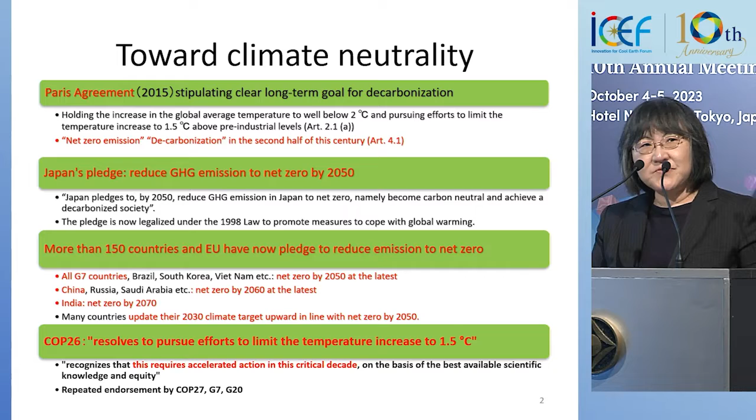Also, in COP26 held in the UK, the climate negotiation meeting, more than 190 countries agreed to pursue their effort to achieve the 1.5 degree goal. This was already confirmed by the G7 heads of states and also G20 heads of states.

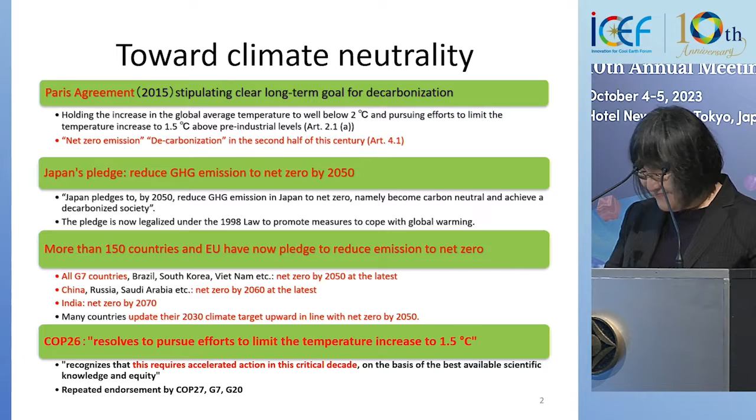The background of such an ambitious target is the feeling of climate threat. As you know, even this year we have had a very severe heat wave, which caused forest fires and also flooding. And climate science shows us that this will become more severe.

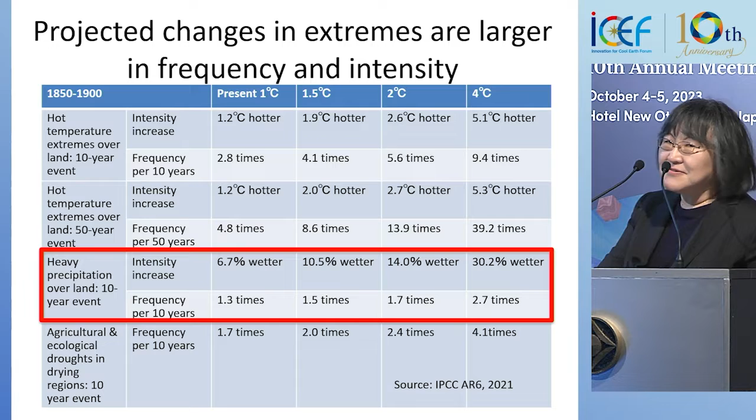Yes, climate science projects that such climate change will become more frequent and more intensified. So the most recent science shown by the IPCC sixth assessment report tells us we have to really reduce our emissions at such a scale and with a very speedy pace.

For instance, by 2030, compared to the current emission level, globally we need a 43% emission reduction to achieve the 1.5 degree goal with more than 50% probability. And looking at the CO2 basis, by 2050 we have to reach almost carbon neutrality.

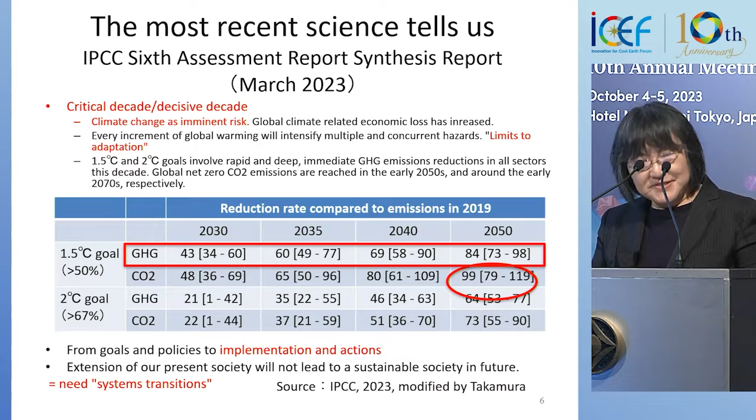So this clearly needs a system transition. Especially here, the topic focuses on next generation PV, and looking at what kind of speed of energy transition, especially in the power sector, is needed.

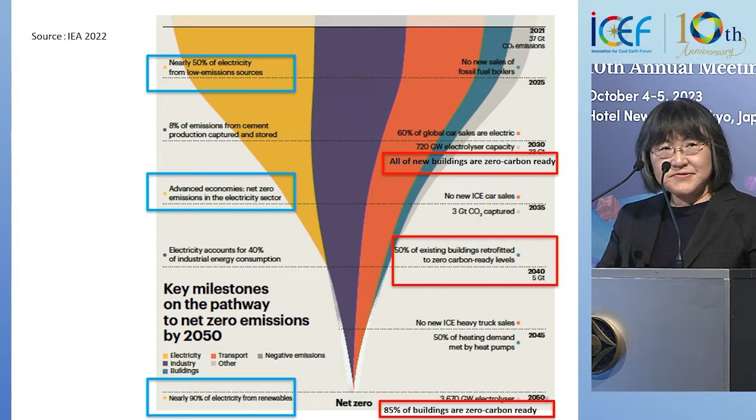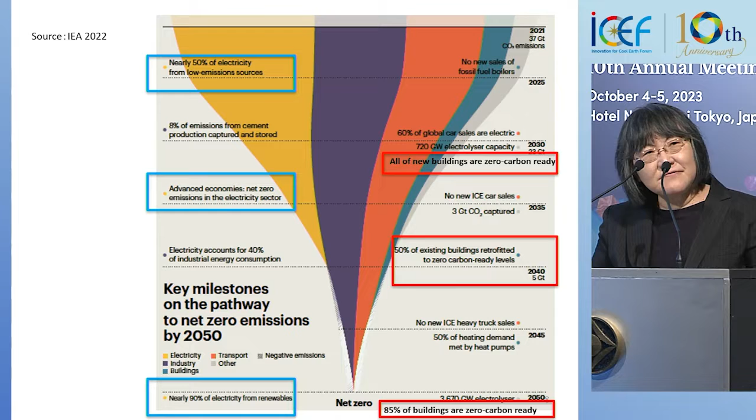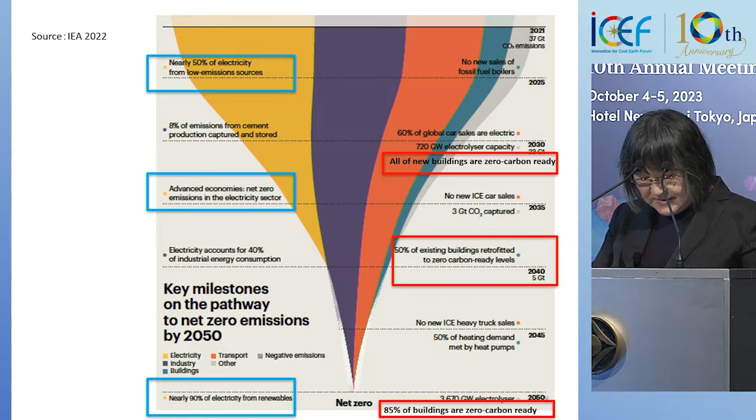This comes from the International Energy Agency NZE scenario, not the most recent one, but published in 2022. By 2025, globally nearly half of electricity comes from low carbon sources. By 2035, developed countries' power sector should be largely or completely decarbonized, shown in blue. By 2050, nearly 90% of power comes from renewable sources.

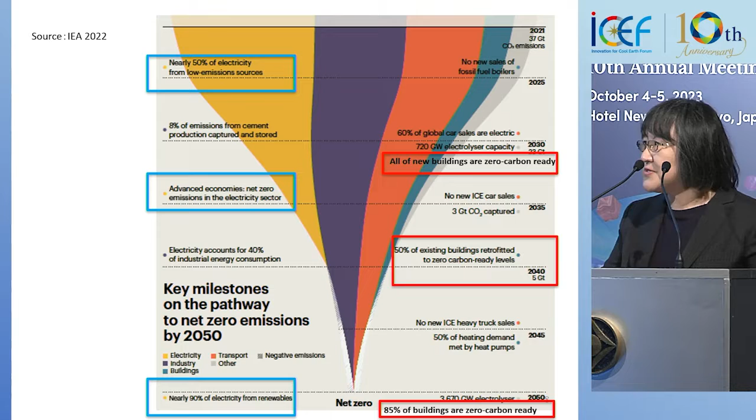So the good news, as Mr. Ando from METI already mentioned, is that we now have cost-effective mitigation options. Among them, solar and wind have the most potential as mitigation options.

And currently, under the expansion of new power generation, new renewable capacity is expanding, and investment is expanding as well.

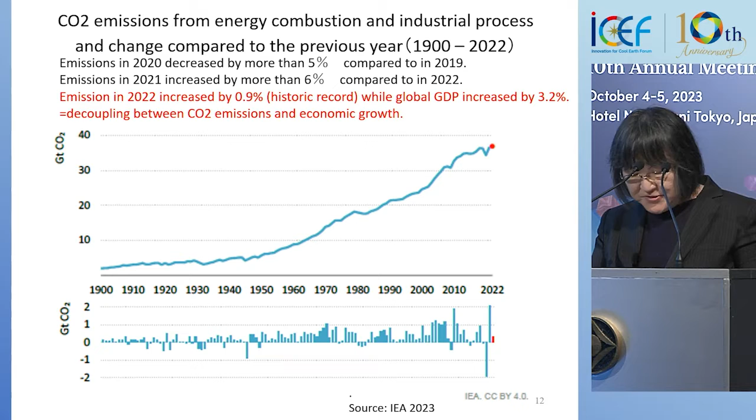Unfortunately, we have not yet reached a plateau of global emissions, but still, in terms of 2022, solar and wind expansion actually offset almost the increase in emissions from the power sector. So that is, I think, a really promising situation toward the decarbonization of the power sector.

But still, in order to achieve net zero by 2050, the most recent IEA report on the net zero scenario says we need to triple renewable capacity by 2030, and beyond that, further still.

So solar especially has a very critical role to achieve such an ambitious target in terms of renewable capacity and power generation from renewable sources.

So I understand that perovskite solar cells have made quite good progress, especially in terms of efficiency, and also the possibility of much broader application, for instance in urban areas, where large-scale deployment of conventional cells could be difficult. Cities account for more than 60% or 70% of global emissions from city activities. So perovskite and next generation PV cells have a critical role to achieve a decarbonized society by 2050.

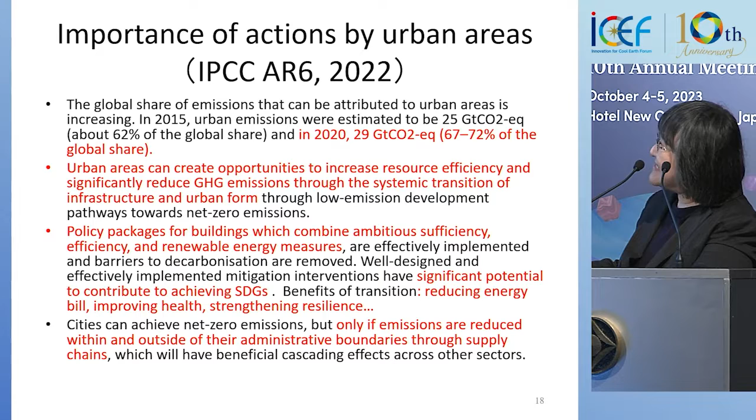Last but not least, I wish to finish my speech with the expectations and challenges of new generation PV. As I said, a greater role is expected in emerging new energy systems toward decarbonization. To make this scenario a reality, we need technological innovation, of course, but also institutional innovation, supported by policy and measures.

So here I just cite the need to create fast and early demand for new technologies such as next generation PV and also create a market. And of course, for new technology we need some institutional arrangement, especially standards, quality control, and the regulatory framework.

Infrastructure is also necessary. So in the end, I think to make this expansion of renewables and decarbonization happen, we definitely need collaboration across a variety of technology areas and disciplines, including the chemistry and chemical industry, the energy sector industry, and architecture and construction companies. I think this panel's following speeches will cover this kind of collaboration.

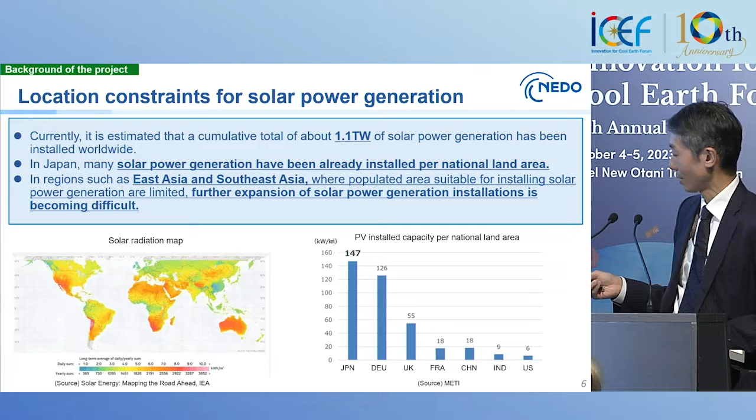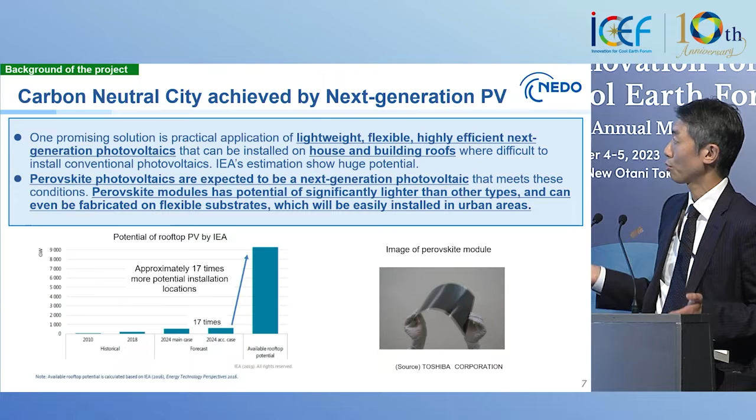So one of the solutions is this kind of lightweight, flexible, high efficiency next generation photovoltaics. The left slide from IEA shows the rooftop and building sector has a huge amount of potential installation of photovoltaics. Perovskite is expected to be one of the key solutions because it is significantly lighter than conventional photovoltaics, and it can be easily installed in urban areas.

In this Green Innovation Fund project, we developed R&D focused on the perovskite project. We conduct R&D focused on high efficiency, large size module, durability, and reliability. We aim for social implementation of perovskite photovoltaics by 2030.

So we have 3 stages. One is laboratory R&D, second is upscale, and third, demonstration project. Now we conduct theme 1 and 2.

One is basic technology, mainly conducted by AIST. Second is the application project, conducted by 5 companies: Sekisui Chemical, Kaneka Corporation, Toshiba, EneCoat Technologies, a spin-out venture by Kyoto University, and Aisin Corporation. The 5 companies in the project each work on a different type of perovskite photovoltaic module. NEDO supports this project.

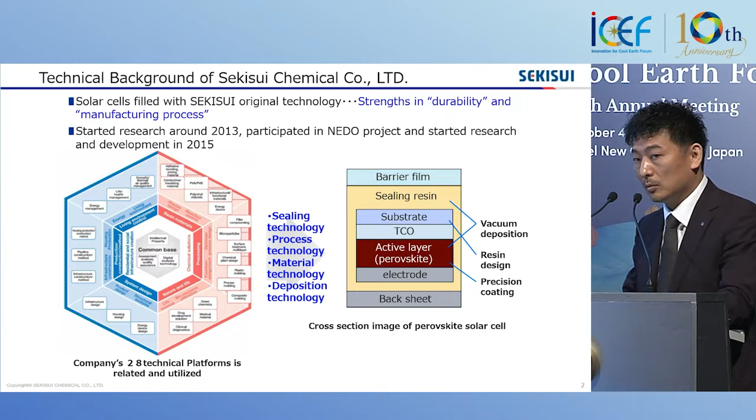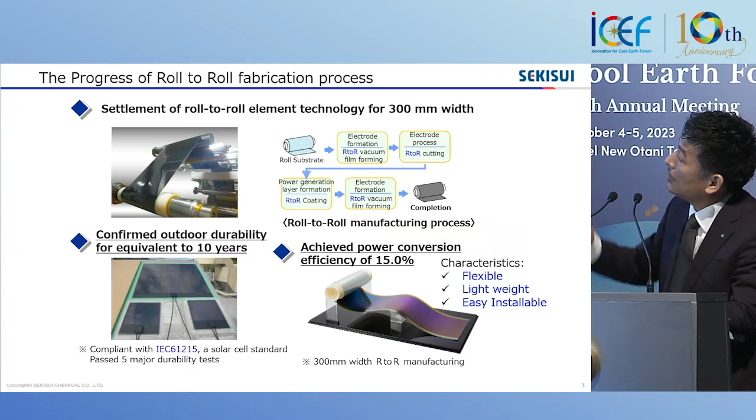In our systems, we are concentrated on the roll-to-roll system for fabrication of perovskite devices. Now we are concentrated on settling the 300 millimeter width. As you can see on the upper left-hand side, this is our roll-to-roll process, and the black part is the perovskite material. The roll-to-roll process is very standard in our Sekisui Chemical company because we handle film a lot.

We have transported this technology to application of device fabrication for perovskite coating. Now we can make, shown downside and left-hand side, devices of 30 square centimeters and 1 square meter devices, compliant with IEC 61215, which is a solar cell standard test 5 major durability testing decided by the rule. Finally, we have achieved a power conversion efficiency of 15% in our roll-to-roll based perovskite devices.

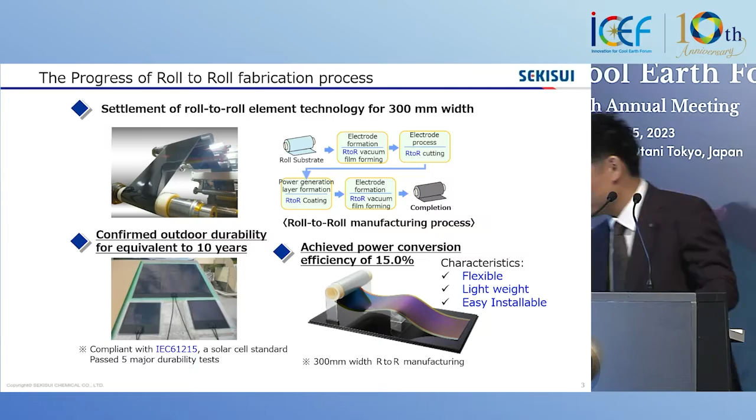So now we have film devices. The characteristics are flexible, lightweight, and easier to install. This is an example of our devices. It's very light and very bendable, flexible, and we can make this kind of device with a very easy fabrication process and low cost.

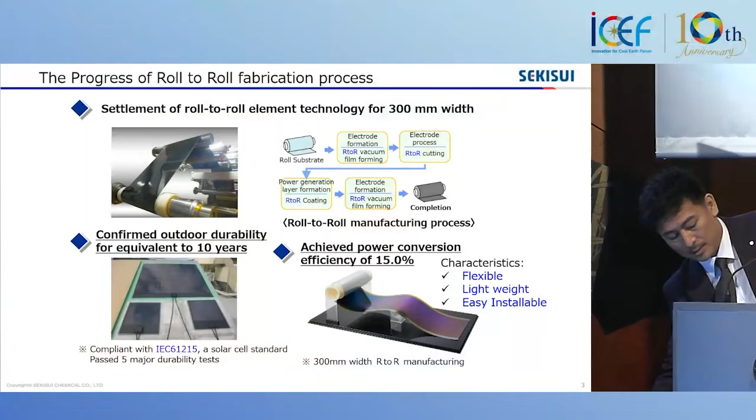Now maybe people are thinking about the very good technology of silicon based photovoltaic systems already. But actually silicon is very great, the solar cell is really nice and efficient. Silicon solar cells already show about 20% efficiency and more than 20 years of durability testing, really stable. Now for our perovskite solar cell at Sekisui Chemical, the current efficiency of the 30 square centimeter device is a power conversion of 15%, and the durability is just 10 years.

So this is not enough for the market. We are thinking about developing 20% power conversion efficiency in the future, as soon as possible, with more than 20 years of durability together with high efficiency. Now we can make 1 meter by 2 square meter modules by roll-to-roll process. It's possible, and it's a very light process.

This contributes to domestic industry, since silicon source is dependent on overseas supply. In Japan it's not easy to get good silicon source, so we need to import from overseas. But compared to this situation for silicon solar cells, for perovskite solar cells, stable supply of materials in Japan is fixed. Perovskite key materials are iodine and lead (Pb). Actually 30% of iodine production in the world is from Japan, fortunately, and this gives a cheap and stable supply of lead, very easy to get. We are also making an effort to develop a lead-free system as well.

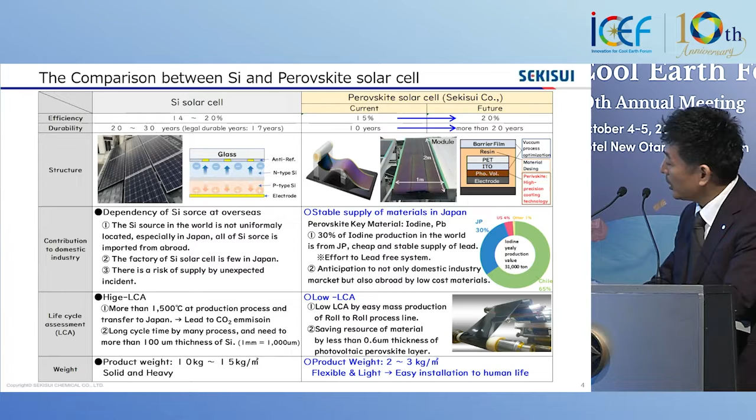Our target for the power generation cost, this is also a target of NEDO, is 20 yen per kilowatt hour, but we are thinking about less than 20 yen. Our final target is 14 yen per watt. This is our target in the future.

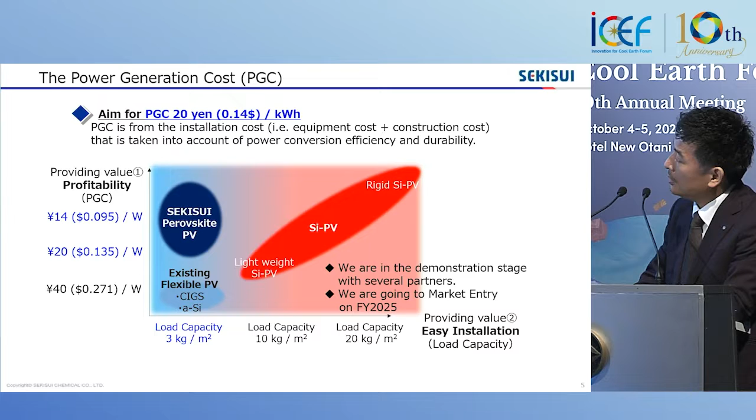We are also thinking about low load capacity. Normally a silicon solar cell shows a higher, heavier load capacity, like 20 kilograms per square meter or 10 kilograms per square meter, with very good efficiency and high durability. But our target for perovskite solar cells is to reach very low load capacity, less than 3 kilograms per square meter, and low cost in the future.

So the center picture shows 3 devices over 2 square meters of our perovskite devices already, and we showed this kind of demonstration in G7 activities.

And now we are thinking about application to buildings. This is a picture of the NEDO building, and also airport, harbor, railway, bus shelter, highway or roadway, and very light rooftops - which is not the market of silicon devices.

We accumulated the market size of silicon solar cells in Japan, now almost 70 gigawatts. The potential market size of perovskite solar cells in Japan, we expect 1.5 to 2 times that of silicon devices. And the expected potential market size of perovskite devices in the world is more than 10 times larger than in Japan.

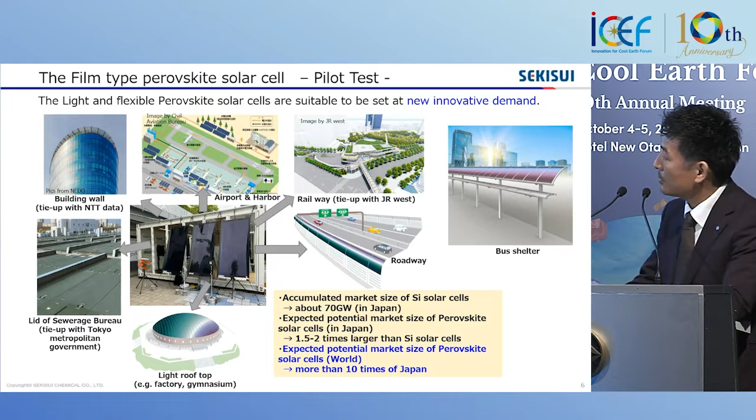So the potential of the company - our Sekisui Chemical Company - is not so small, and we have many possibilities in personnel. We believe that we can manage by ourselves the supply of perovskite devices.

So now Sekisui Chemical Company wants to achieve a sustainable society, from sustainable materials to sustainable energy, through our perovskite device technology. Thank you very much.

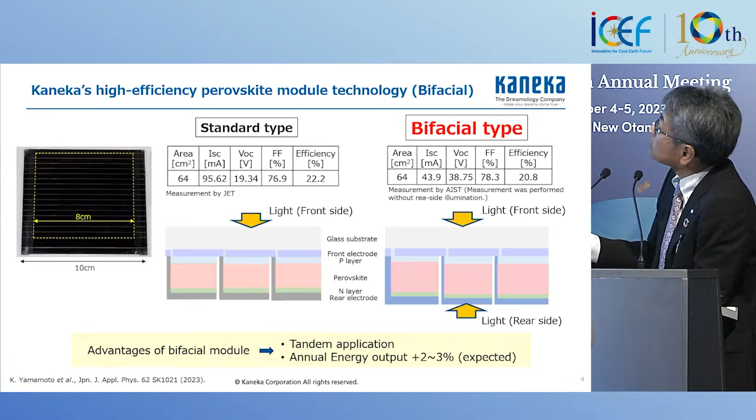And P3 of that series accomplishes series interconnection, then wiring, lamination, and IV measurement. In the see-through case, we sometimes remove the active layer by see-through laser patterning. This process is very robust and, moreover, fully integrated. Once you input the glass, you get the module product, already measured, laminated, and wired. This is very important, and usually in one factory, only 2 to 3 hours accomplishes everything, completely different from silicon.

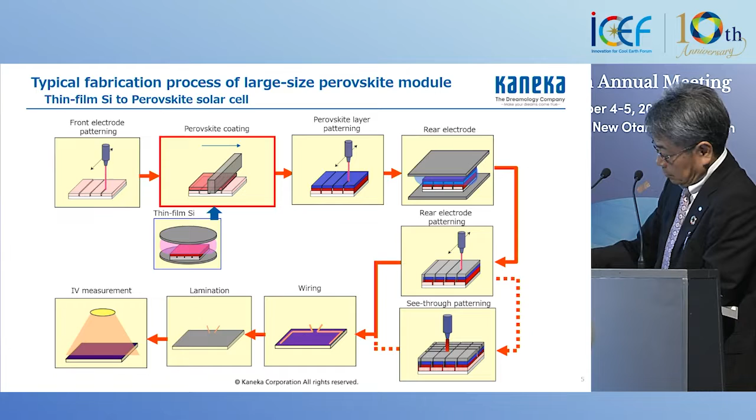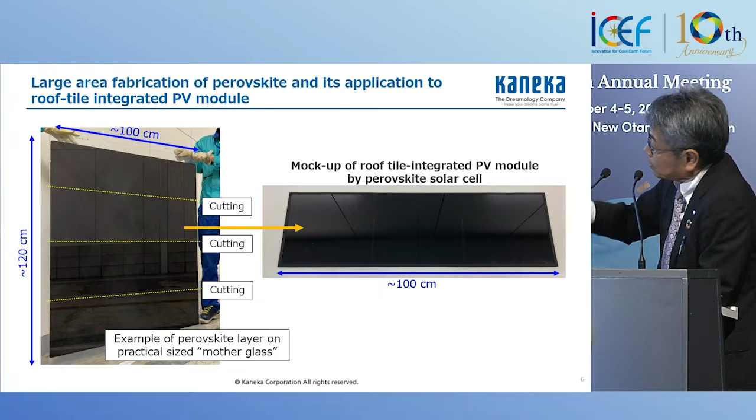One of the applications: we have not decided the mother glass size. For example, once we apply 1.2 by 1.0, we divide and cut it, and then we can make a whole perovskite solar cell for roof tile integration. This is automatically performed, fully integrated process. This is an example of the see-through module.

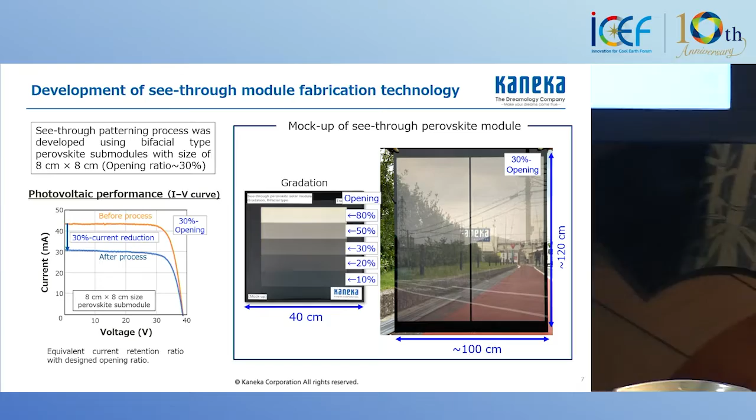Probably you can see my face. Okay, so...

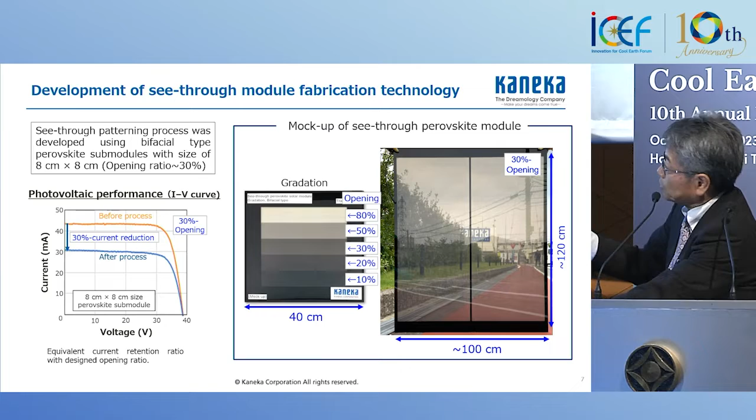For making a see-through module, this original yellow is the original one, and then we remove 30% to create an opening. This is a case of 1.2 by 1.0 mock-up of the see-through type. You can see that this is bifacial, and from the front side to the rear side you can see the background of the picture.

We can also use laser scribing to change that opening ratio, 10 to 80 or 90, and at the same time we can create gradation like this. This is thin film silicon, thin film technology, and our perovskite is also bifacial. We can apply that bifacial module combined with silicon.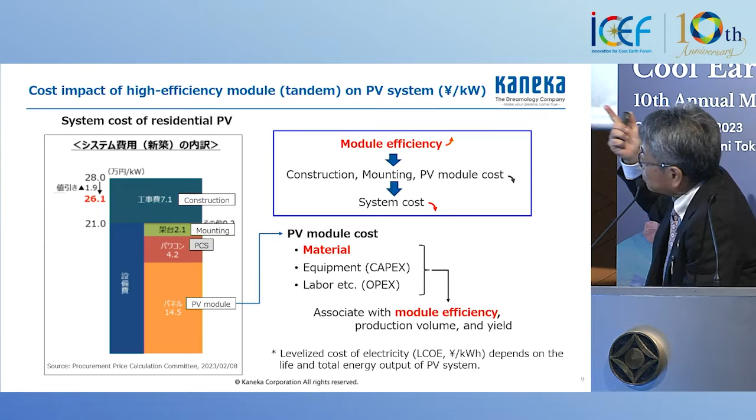Panel cost itself includes material, manufacturing equipment—what we call CapEx—and also labor and utility, which we call OpEx. In the end, material cost is really key. Material is not only the perovskite itself, but also several other components. I have to finish. In any case, module efficiency is important, along with volume and very high yield.

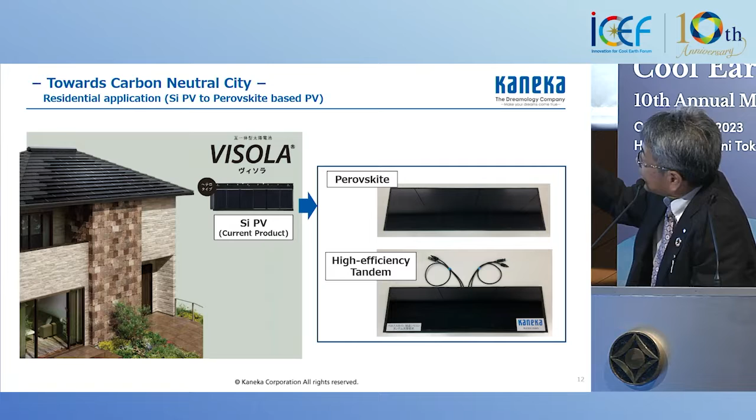This is an example of our perovskite tandem—perovskite and crystal silicon tandem mockup. Let me talk a little about that. This is a case of roof tile integration for an urban house.

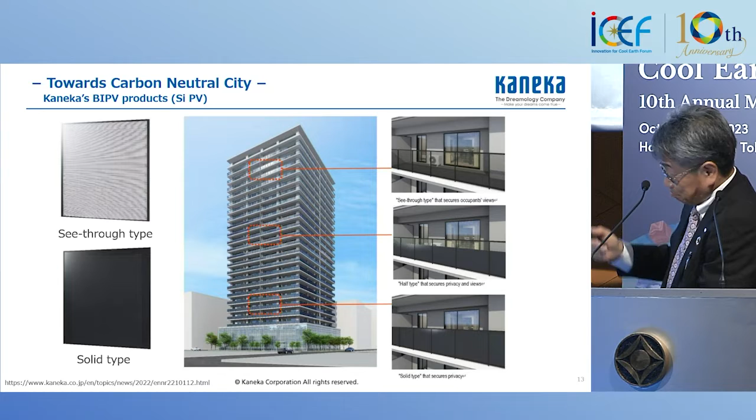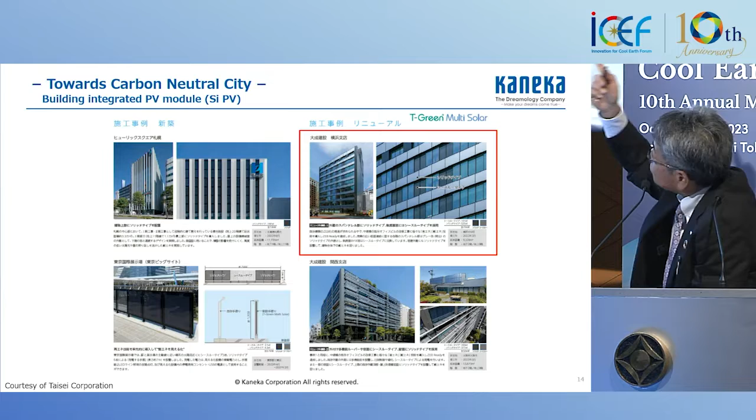Let's take a very quick look: our see-through type and solid type are both used. At the higher level, we apply very high transparency see-through panels; at the lower level, just a solid one is put on. This is an example, courtesy of Taisei Corporation—I want to show you Taisei Yokohama, this is a renewal. The solid type is used as a spandrel, and the see-through type as a window, not all of them. Total power of 72 kilowatts is expected.

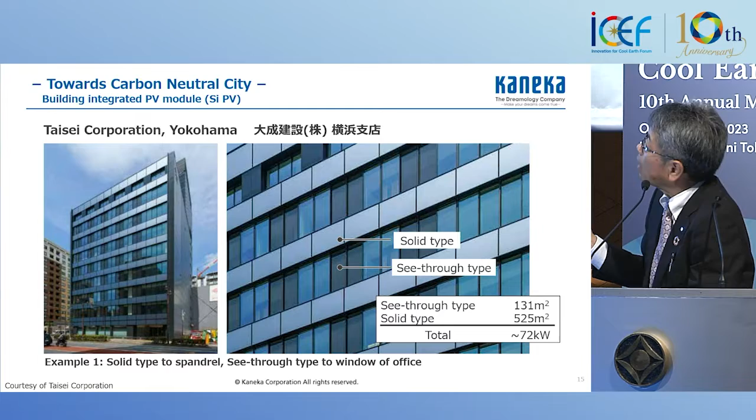Thank you very much.

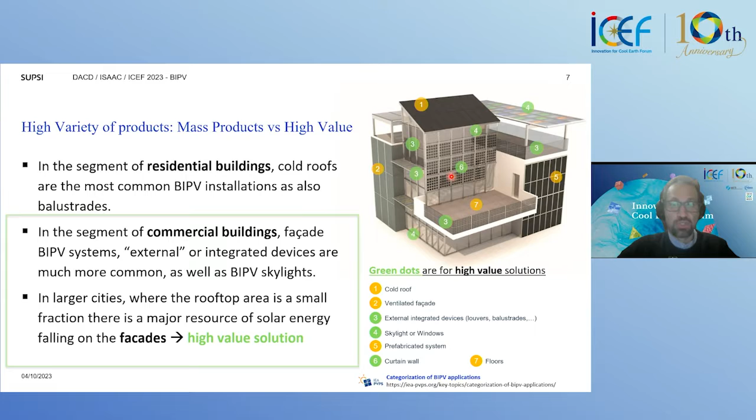To give you some numbers, today there are more than 5,000 multi-story and highly glazed buildings under construction or proposed worldwide. The major role is in Asia, especially China, which is the highest market for BIPV and glazed skyscrapers. But also North America plays a key role in this sector.

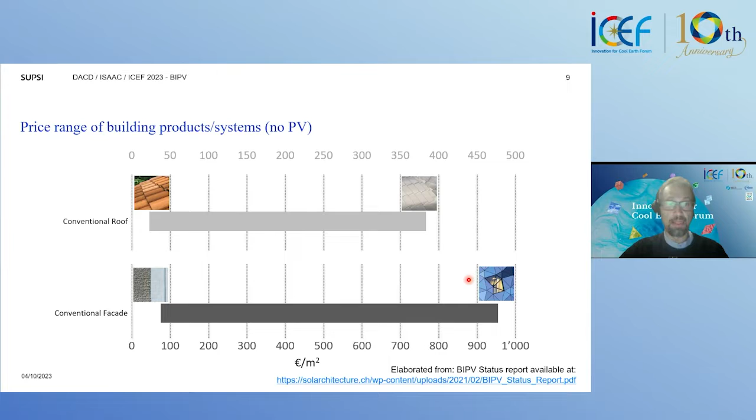To conclude and summarize the challenges and opportunities when developing new perovskite solutions for the building market, I encourage considering the following: BIPV has to face articulate buildings normally in dense urban environments where vegetation is also present, and architects and facade engineers need to work not only with glass solutions but also other materials such as ceramic, aluminum, concrete, or fiber cement.

So therefore, next generation BIPV solutions, including perovskite, should consider the possibility of different geometries and shapes, the capability to resist against shadows, and the ability to be incorporated and coupled with materials other than glass. Colorness is also very important, and it's mandatory to consider normative requirements and the topic of circular economy.

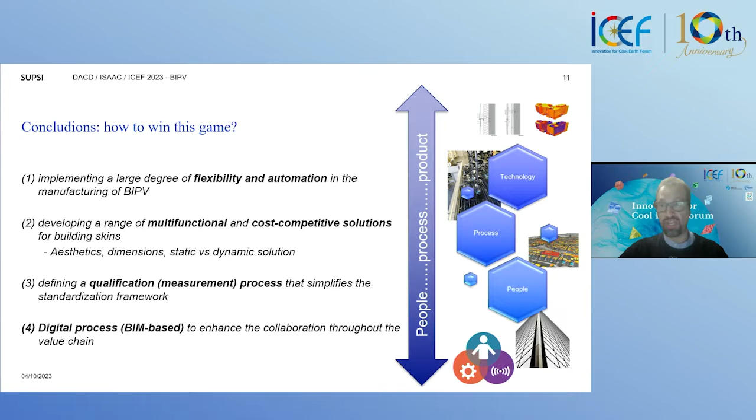So how to win this game? It's important to further invest in flexible and automated production lines to be able to offer the market a wide range of products that are also cost competitive compared to conventional building elements. Standardization has to be improved, and digitalization can support and enhance collaboration through the construction value chain.

If you want to learn more about the status of BIPV, I encourage you to have a look at our latest BIPV status report. Thank you very much, and sorry for these technical issues.

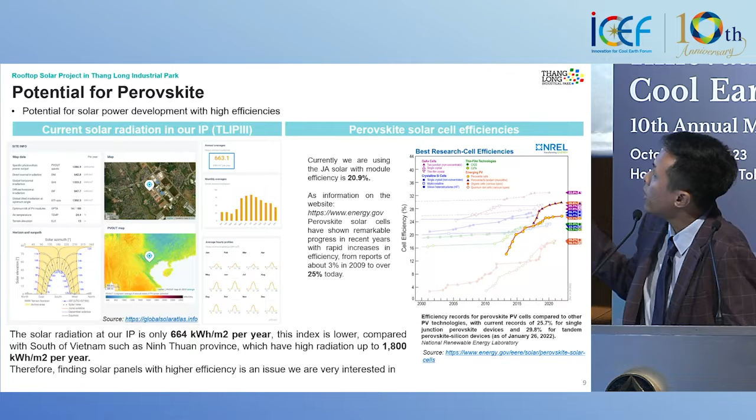Looking at the charts, perovskite can now go up to over 25% efficiency, compared with the current silicon solar panels we are using, which is around 20.9%. This is extremely promising. Therefore, finding a solar panel with higher efficiency is an issue we are very interested in.

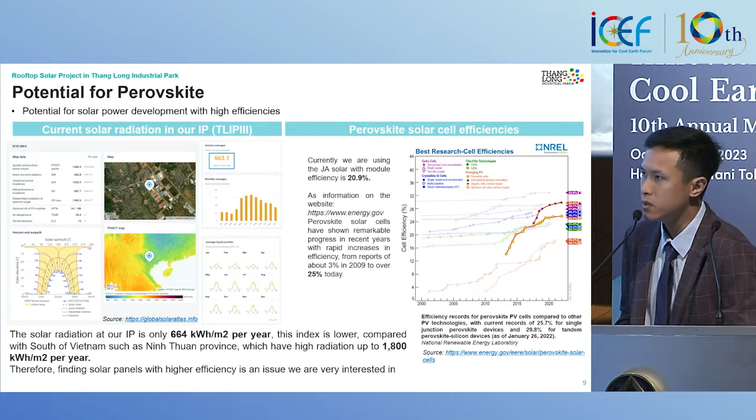Following the presentation, we will have a panel discussion on carbon neutral city achieved by next generation photovoltaics, and Professor Takamura will act as the moderator. All the panelists, please go up to the stage.

So now we turn to the panel discussion. I personally very much enjoyed each presentation by the panelists. As we all know, today's focus is next generation PV, perovskite PV, which actually has quite the strength and potential for the challenges we face toward decarbonization, not sufficiently addressed by conventional PV, beyond rooftop installation.

In East and Southeast Asia, including Japan, some countries have very limited land area with very high population density and highly developed or emerging cities. In order to achieve global carbon neutrality, we definitely need to expand green electricity, green power from renewable sources in each country and region.